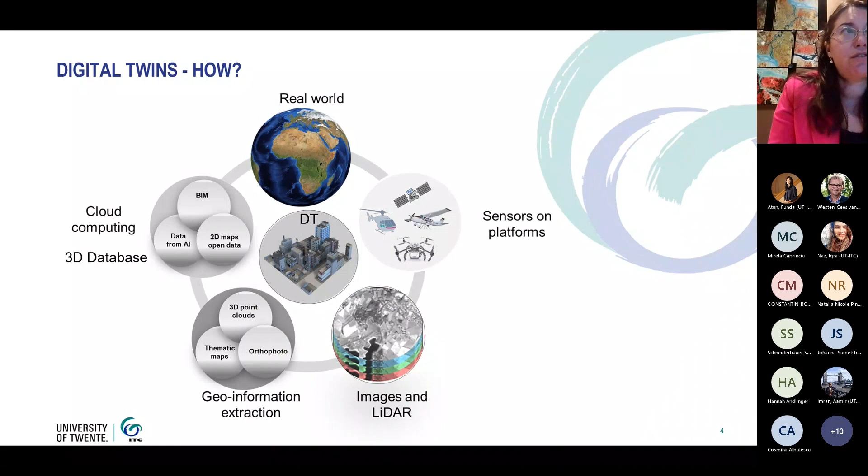You can see here on the slide that to represent our real world, we start by using different sensors like satellite images, aerial images or UAV images. We can also use sensors like LiDAR technology. And then having this information, we think how to extract meaningful information which will serve our purpose of creating our digital twin. We can, of course, use some automation or cloud computing, and we can store all this in digital databases. So usually this is the workflow that we are following. Of course, you can use part of it, or you can do different other combinations.

But as I mentioned, it's very challenging because every application can have a different approach. If you look at the first video in the top left side of my screen, you can see a transport case. What kind of data do we need for such type of case? How do we visualize it? What kind of information do we need to integrate?

On the second video, you can see that we can do different analysis, like shadow analysis. We can go on different scales, like a building scale or city scale, depending on the purpose or the application that we would like to focus on.

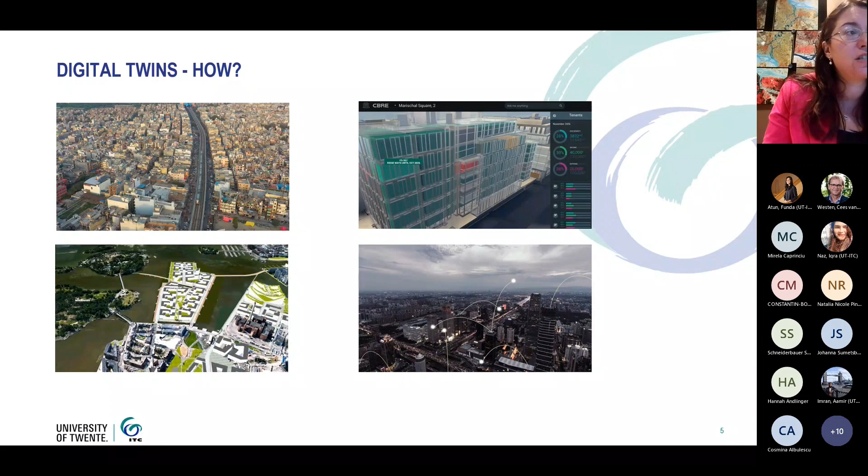On the third example, you can see that we can also use information from citizens. So all of you as citizens can contribute to our digital twin creation. We can use artificial intelligence or store the data in a cloud and distribute it via different networks so that we reach maximum efficiency and effectiveness of our 3D city creation. So you can see here some more of the video.

And the last example is how do we visualize our data to different stakeholders? So we need to adapt to whom we are presenting our outputs, who will be working with our data, are our stakeholders able to visualize and distribute it? So all these components, you can see that they hide different challenges. And it's quite a complex, let's say, topic.

There is some noise around. I would like to ask you to switch off your microphones, please. Thank you.

So also we can think, how do we integrate these different types of data coming from different sensors so that we collaborate with different stakeholders? And then we go to the level of planning, making different solutions and going forward to predict the future. And we can also visualize our final results in different ways.

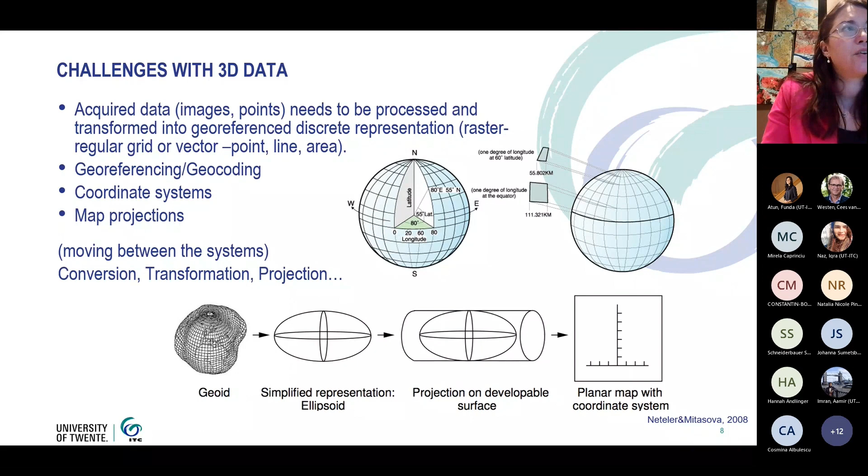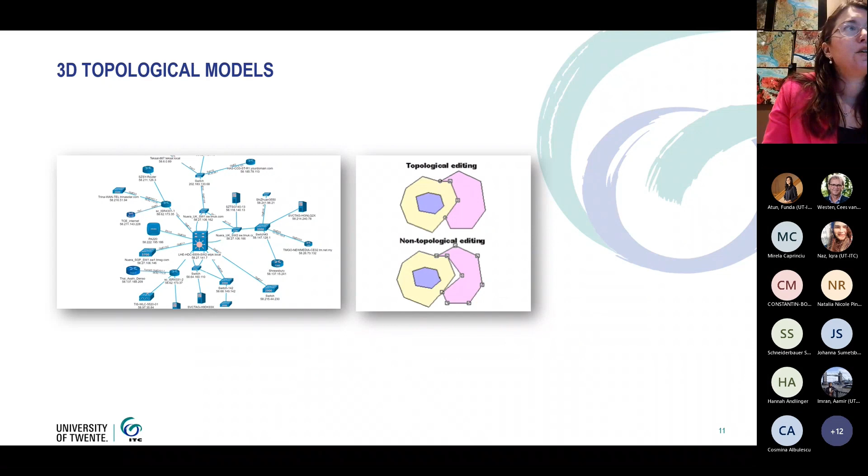Apart from that, we need to keep some logic, and we need to keep some links and relationships between our geometric models. And we also need to know what our elements mean. So we need semantic modeling. So whether we are representing a school or a hospital, this is semantic information attached to each individual building. So basically, this was a foundation of why, what, and how we do digital twins.

And here I would like to share with you some challenges that we can tackle by having a virtual replica of our environment. For example, we can solve some challenges related to transport, the built environment or urban mobility, some problems related to climate resilience, climate change, or simply communication or asset management.

I would also like to draw attention to the question of how digital twins can help manage or respond to natural disasters. I believe you're more expert on this than me, but if we ask this question, we can think about how a digital replica of a city can help emergency responders access a real-time understanding of the disaster, how it can impact the physical assets, for example. We can get some insights on the nature of the disaster, on potential effects of these disasters. And for example, we can think of strategies and plans for recovery or reconstruction after a disaster.

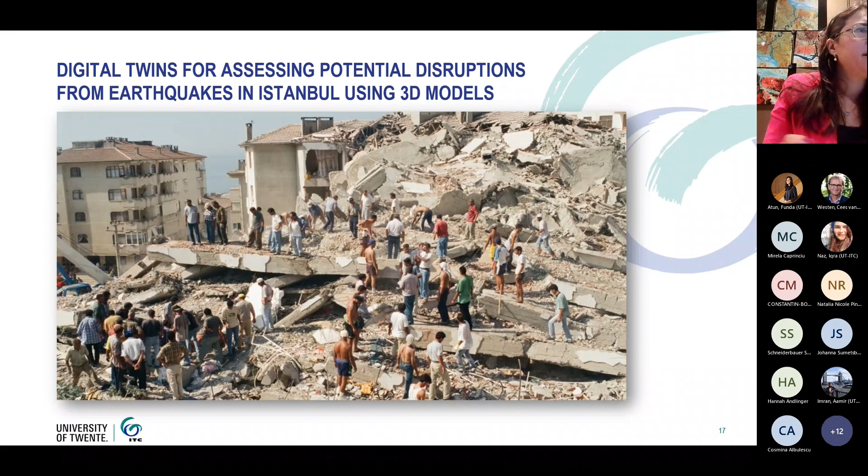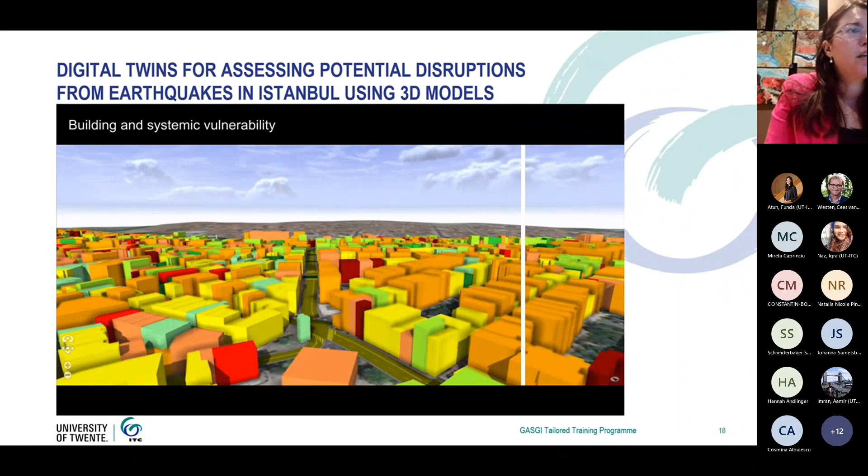Here is one application related to assessment of potential disruption from earthquakes in Istanbul using 3D models. You can see in the video that I will just start that our student who was working on this topic assessed the vulnerability by a very detailed assessment of each building, coloring it according to potential vulnerability. He also colored and assessed the road closure. For example, if the building collapses, how much of the roads will be blocked, what type of mitigation strategies can be performed.

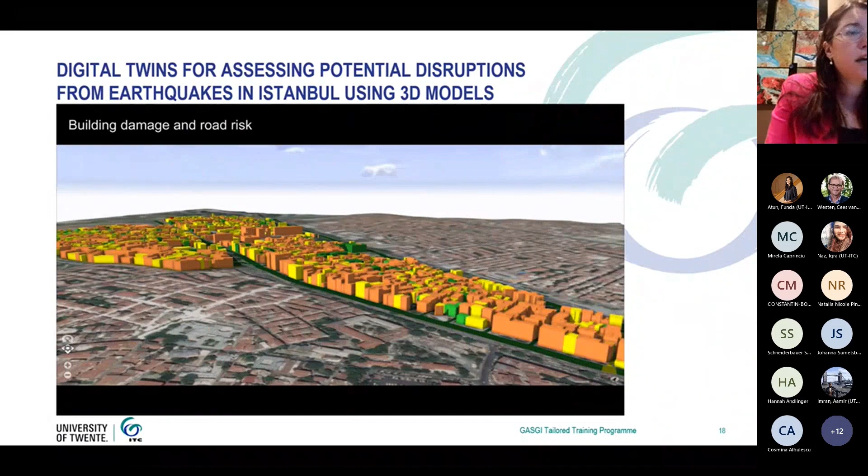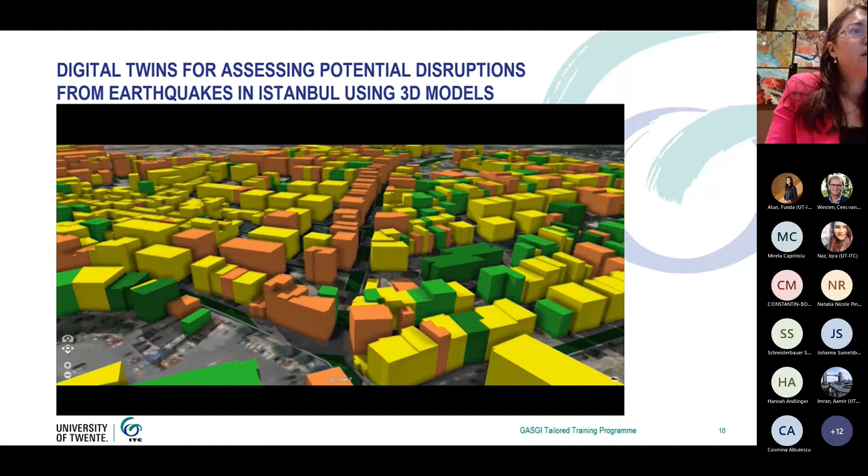All this was done in advance so that if there is a disaster in Istanbul, all needed parties and stakeholders have some idea where to react first, where to go, and where the people will be most vulnerable. You can see here building damage disaster and local road closure risk assessment.

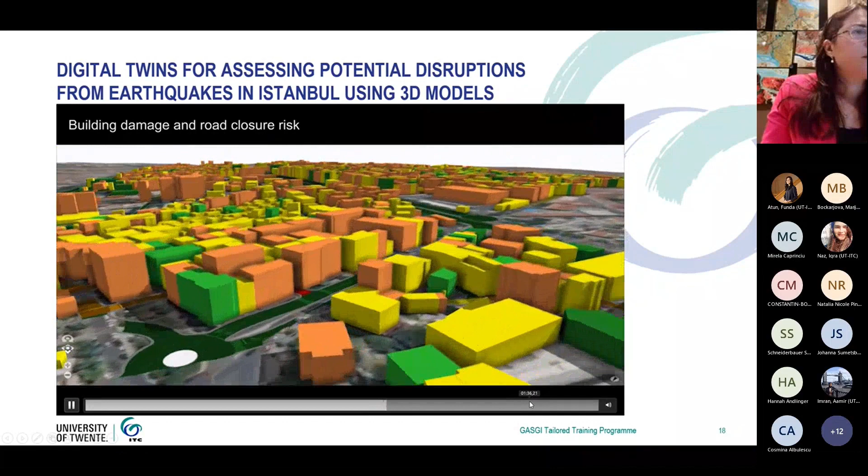Another case that I want to show you is related to a flood disaster possibility and how such a type of disaster can influence the distribution of a certain disease. If you look at my video in the lower bottom corner, you can see a very simple visualization of a flood in a slum area in Brazil, and we assessed, in case of a higher level of water, how many people would be exposed to this disease called leptospirosis. So it was a very detailed analysis.

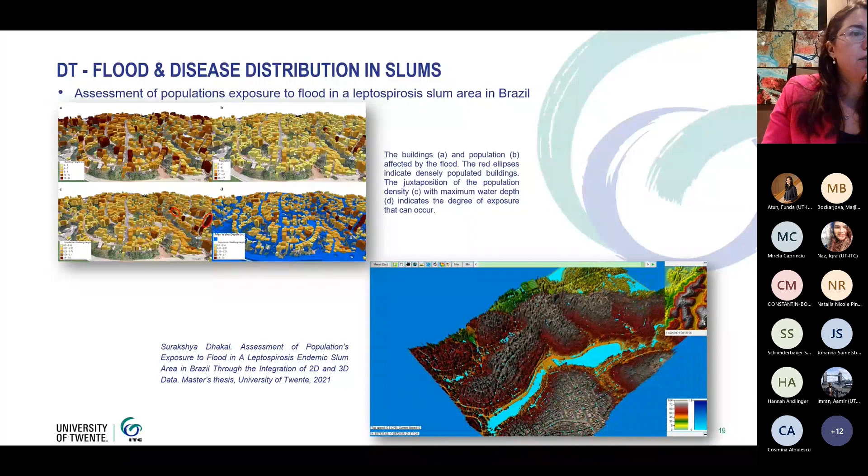For all examples that I'm giving you, you can see on the slides there are links. So if you want to read more, you can always go to the slides and check the publications yourself.

Here is one example related to digital twins for South Africa, and the project was called Jo'Trash. Here the students were trying to create a digital twin in support of effective trash collection. You can see here the method they have been using. It's ArcGIS plus dashboard. And what did they do? Basically, they created a 3D model. They located the garbage bins in the city. They also assessed the land use and the population density in the city.

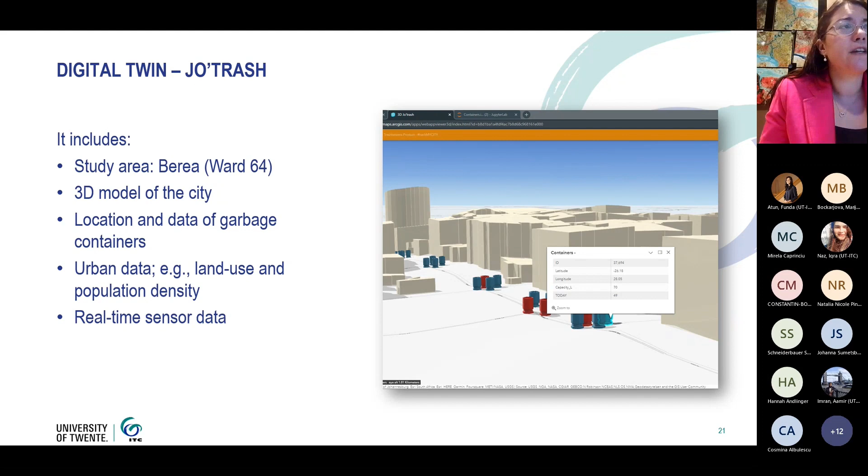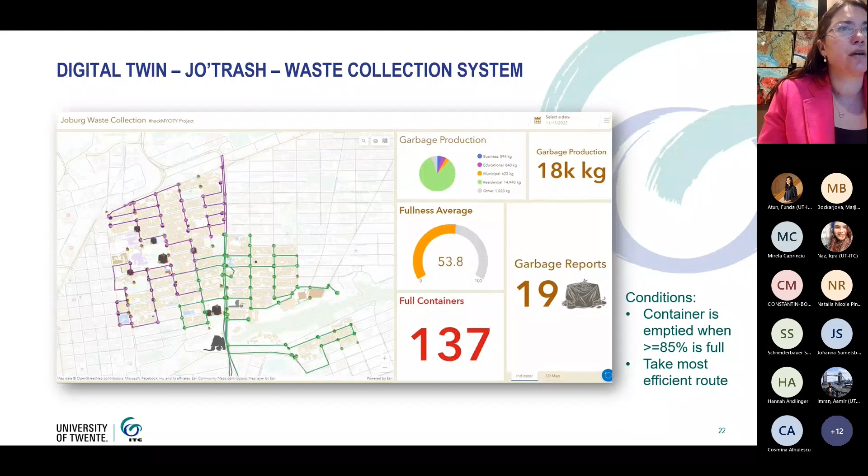And there are real-time sensors in each of the garbage bins, giving the level of fullness of each of them. So you can see that they created this dashboard, which collects real-time information and visualizes the status of each garbage bin. So basically, people in Johannesburg can scan this QR code and also give information to the stakeholders where they have to adequately collect the garbage. For example, there might be an illegal trash place, so they can provide information so that the authorities can take action on that.

You can see here how it looks when you scan this QR code. You get into this visualization, and this is the way you will see how full the containers are and in general their status.

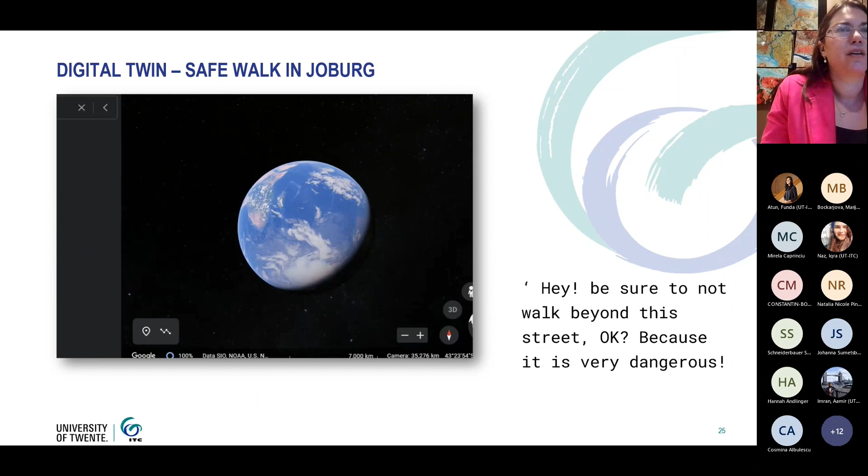Another example, again related to South Africa, was an application of digital twins which is similar to Google Maps, but instead of giving you the fastest route from point A to point B, since in South Africa there is quite a challenge related to safe walking in the streets, you get the safest route in Johannesburg. So I can show you what the students have developed. It's a mobile application, which also has a desktop application, which, like Google Maps, can give you the safest route from one point to another.

And since real-time data is involved, these routes are continuously changing. Also, as a citizen, you can provide some information so that these routes are continuously updated. If you see here on this slide, we have integrated static information and real-time information for this application.

And this is an example of the same development, but in a desktop version, which is being, let's say, monitored continuously by the involved stakeholders and organizations that need to take action about it. This is also the methodology, if you want to know how it was done. And this is what you get during your usage of this application.

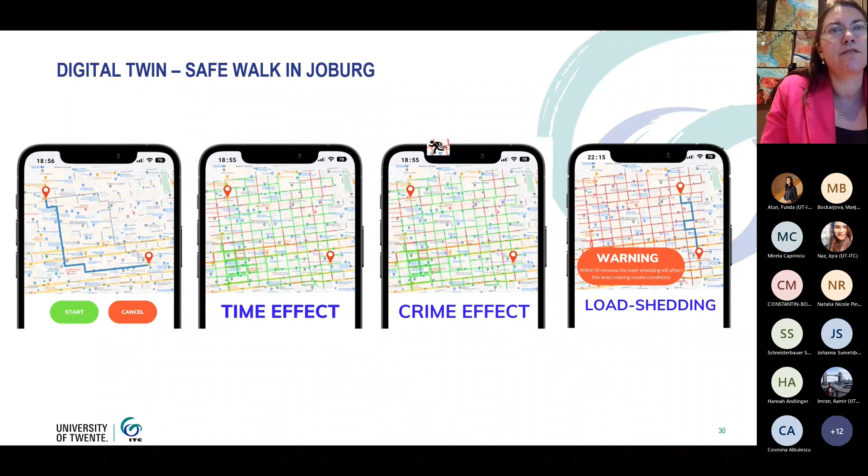So you can have the time effect, you can have the crime effect, and you can see here some warnings. When you're walking, you can see a real-time warning: okay, please avoid this road, go left, right, something like this. How can this also help urban planners? Of course, it can help because they can also monitor how many inhabitants have been in danger on certain routes, so they can take some actions to, let's say, improve this situation.

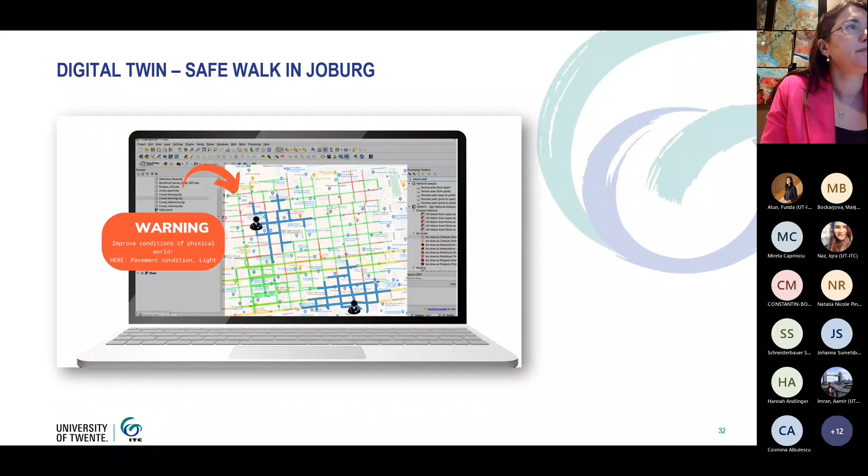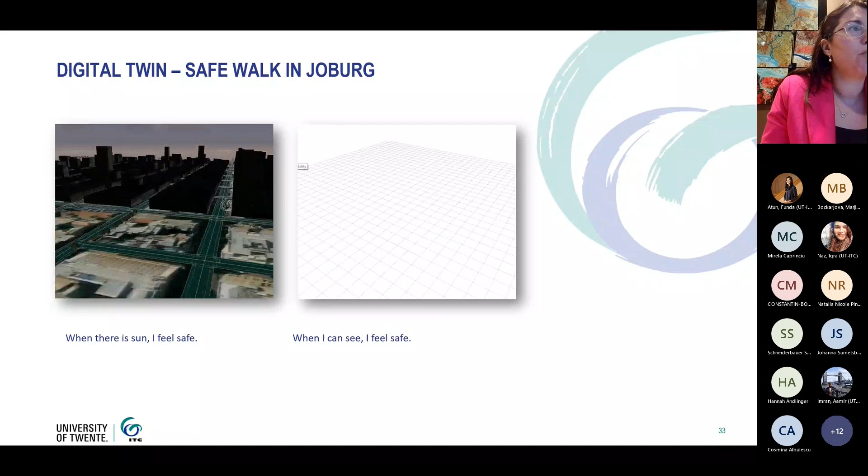This is the same story, but giving you warnings on the desktop. Apart from that, you can see that the application also incorporates some kind of 3D visualization, which takes into account the sunlight. So if there is sun, you feel safe. So it also gives you those streets that are open, that are bright. So it gives you a safer feeling when you're walking and navigating through the city.

And the second video I will show you is again related to that, but not with the sun; when you can see more, the openness of the streets also plays a role.

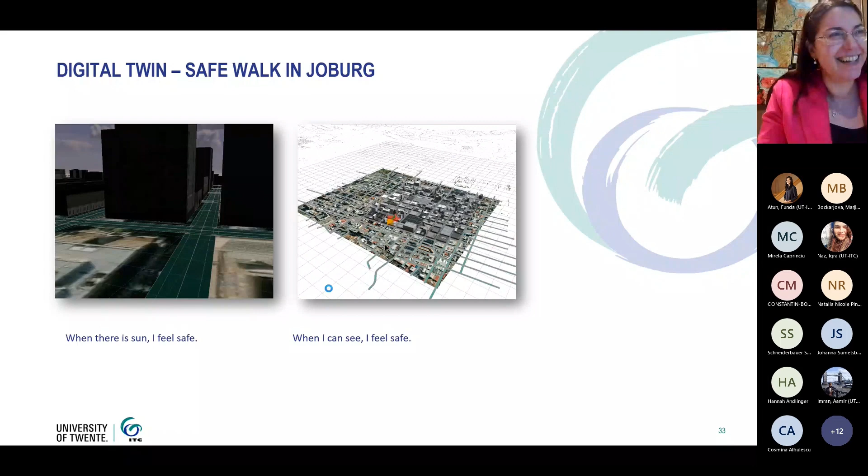Just a sec. Okay, the presentation crashed. It seems the video didn't start. I will restart it. There are too many videos in this PowerPoint. You also have a very interesting desktop. Sorry, very full. Yeah, sorry, I will restart it. Wait, we were up to here, yes.

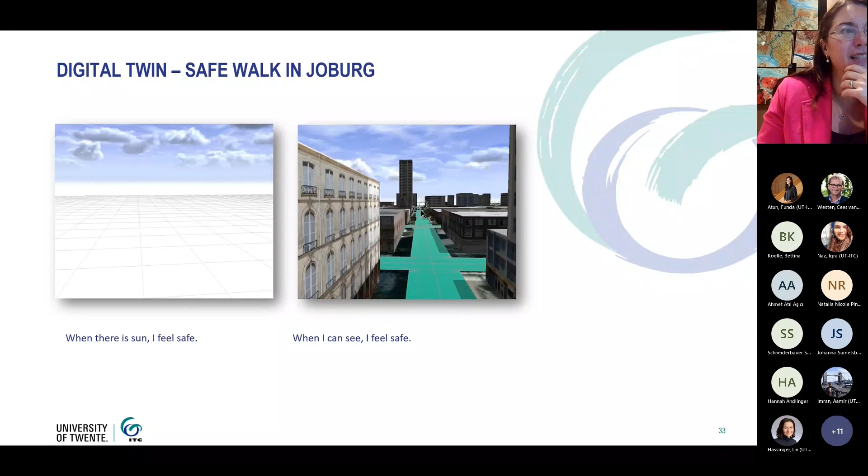So this was the video which we stopped. On the right one, you can also see how the students have performed visibility analysis. So one was shadow analysis due to the sun effect, and the other was a visibility analysis. And all this is integrated in the application that you can have on your mobile phone.

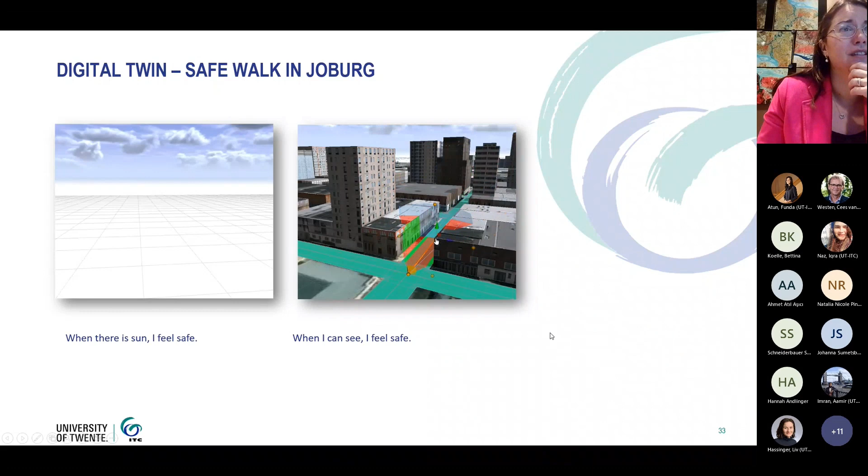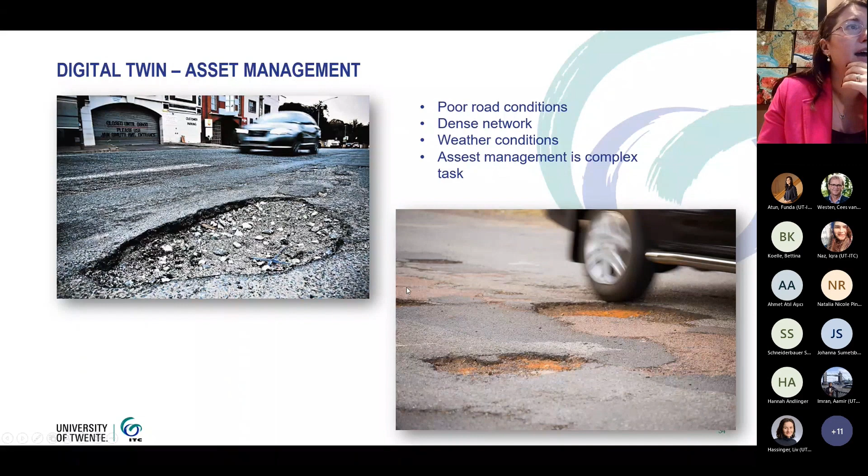Another application I want to show you is related to asset management. There are many countries where the roads are in poor condition, and there is, of course, a very dense network, and due to weather conditions the roads can be damaged. So how to tackle these problems and how to get, let's say, continuous real-time information so that we can update? You can see here the application that students have developed. They have visualized the roads based on their status in terms of asset. And you can see the dynamics.

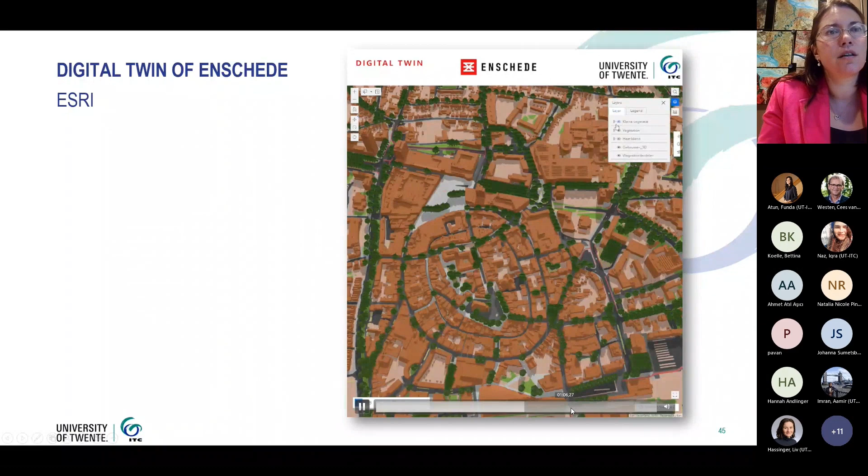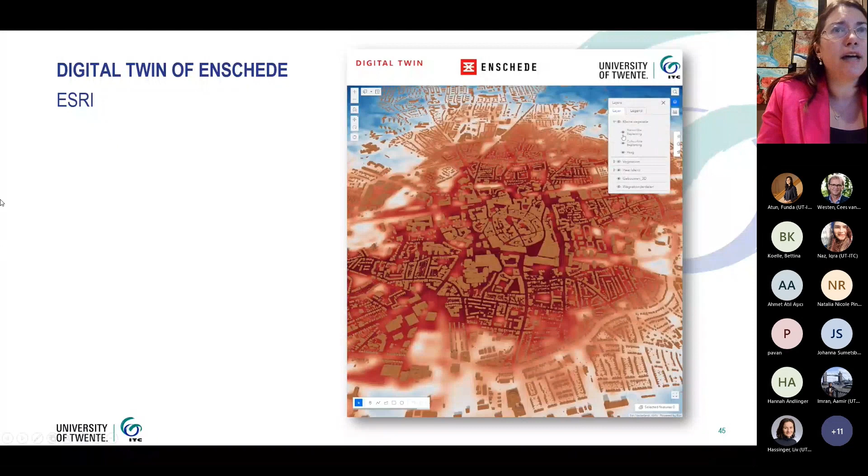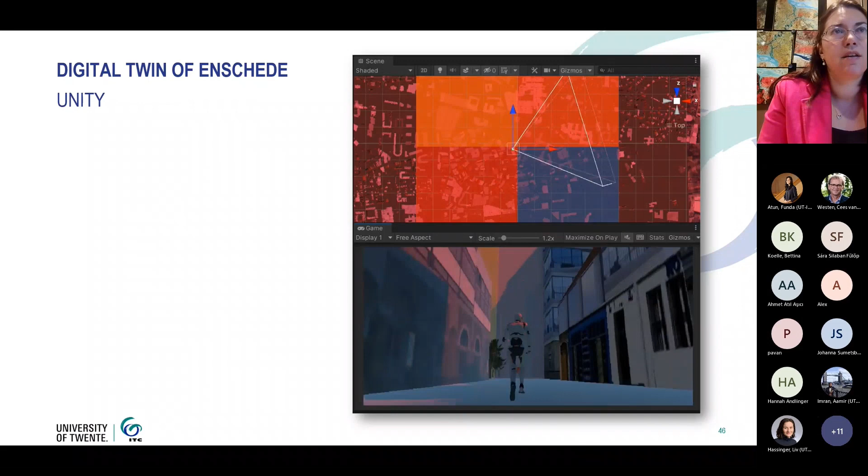But the more important thing for me was to show you that you can have this heat map overlaid on our city, and you can visually see where the critical areas are. So this is using a GIS type of platform. How can we use that in a virtual reality environment? This is the Unity platform. I will show you this video where, if you walk inside the city in 3D, you can already get your orientation on where it is warmer and where it is colder on your way. So there is a combination of top view and first-person navigation view.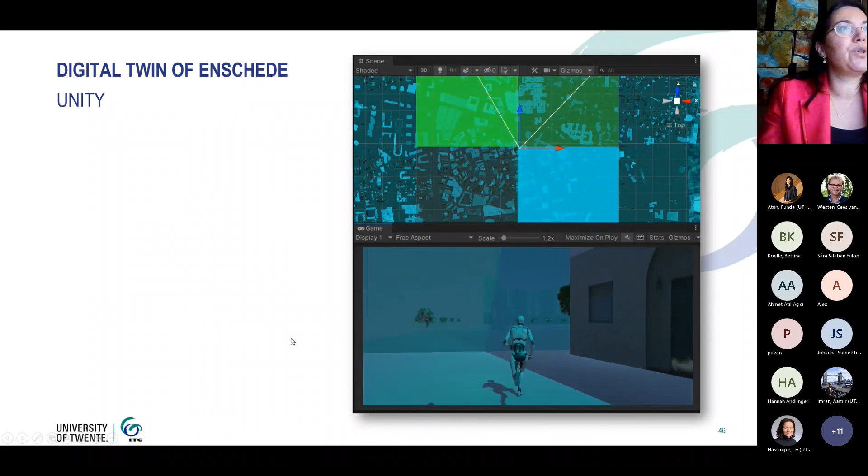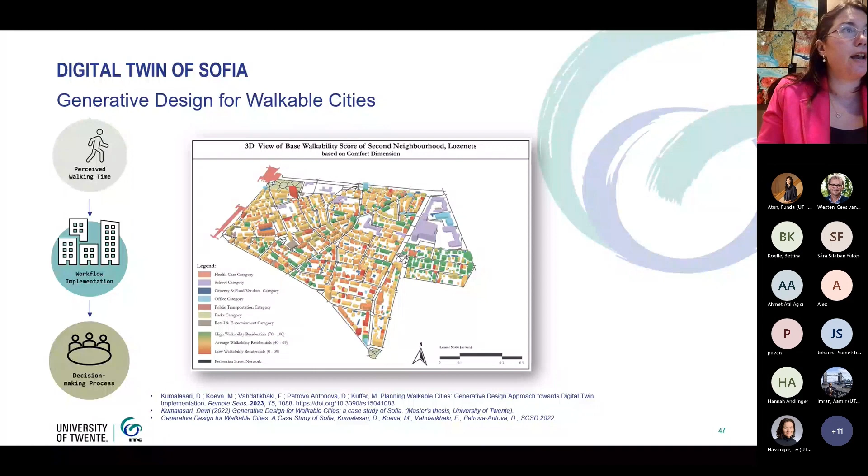And this is my last example for today, where I want to show you how challenging it is to visualize different types of data sets so that we create our digital twins, and moreover to show them in a web environment. So this is again our city of Enschede. And you will see that we used different open source data to visualize our city in different levels of detail. And you can see here that we are coloring our buildings depending on their purposes.

And apart from that, for this application, we have integrated different types of data. You can see UAV data, terrestrial laser scanning data, but also mobile application, which means people data. And we try to also visualize it in virtual reality. So this yellow dot on the video is our new building where we are currently located. And basically we wanted to

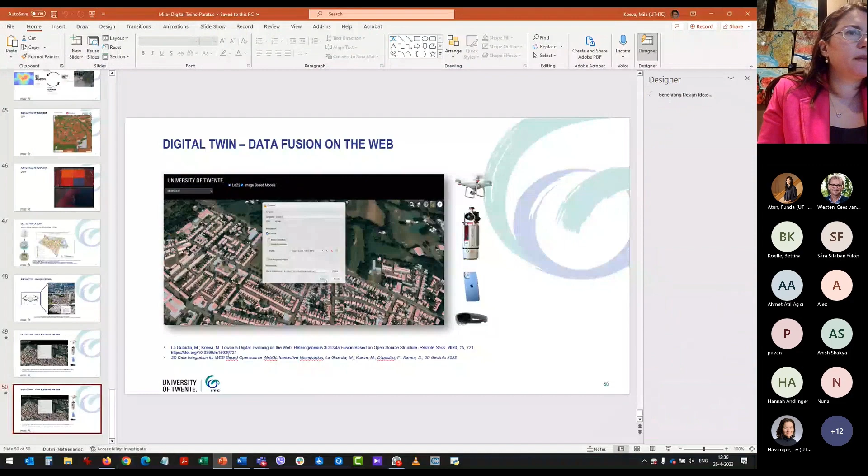Here it is. So what did we do? We have acquired with drones, as I mentioned, but also with terrestrial laser scanning and mobile laser scanning. And you can see that we can visualize all the stages of the construction of our building with so-called point cloud data. So you can see the ground floor, then I will now switch to the first, second floor. You can see it doesn't look very beautiful, but it's because it's all in the phase of construction.

And the challenging part of this work was to integrate different types of data. So you can see this is a BIM model, building information model, which is combined with the point cloud data, and you can access the building from outside, from inside, and get a 3D realistic overview of what the building will be. So that was my last example.

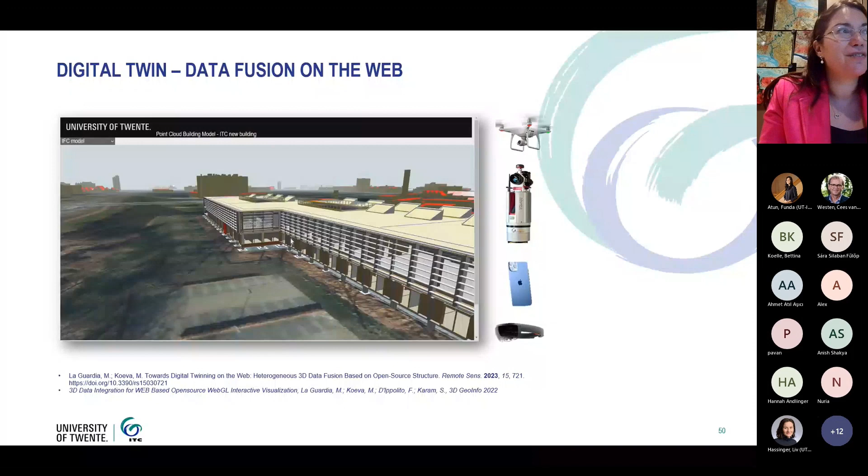I hope it was interesting for you, and I hope I gave you some insights into how you can use digital twins for your applications.

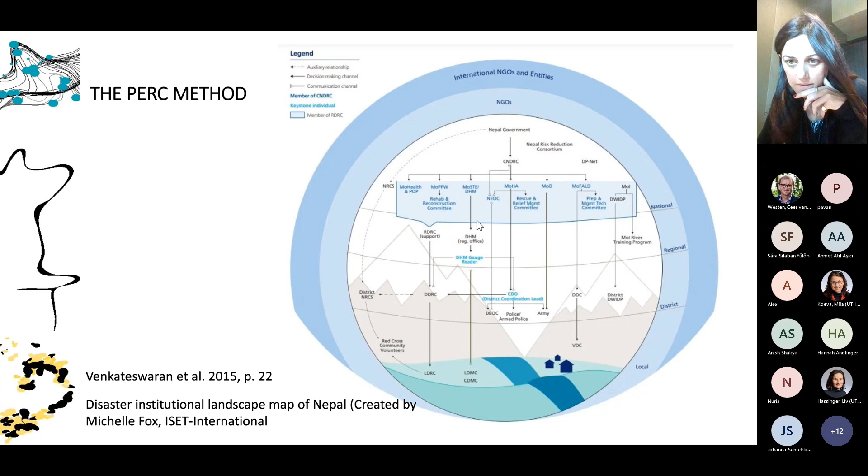So this is an example of how they mapped the institutional landscape. This is for Nepal. They are mapping them, but they're also showing how the relationship works among these different institutions that are responsible for disaster risk management. And they also included some NGOs and political organizations, for example, here there's the Red Cross community and other political organizations.

And I just included these questions as examples. So I showed you three different components, and I also showed you the characteristics or indicators that they use to investigate these components. And for each component later on in this report, there are various questions, and these are some examples. They also divided these questions according to different phases, and here the first questions are to understand the situation immediately after the disaster.

It asks whether the evacuation worked, and the early warning, about protection of important assets, and what was the impact, what was the indirect impact of the disaster. And then we have the response and recovery phases with different questions. If you want to use this method, there is a huge report, here is the reference and also at the end, and all these questions, you can have a look at them to understand how they assess the capability of these three different elements.

Okay. This is the third one. It is detecting disaster root causes by this German organization, DKKV. For example, they say root causes are an interrelated set of widespread and general processes within a society.

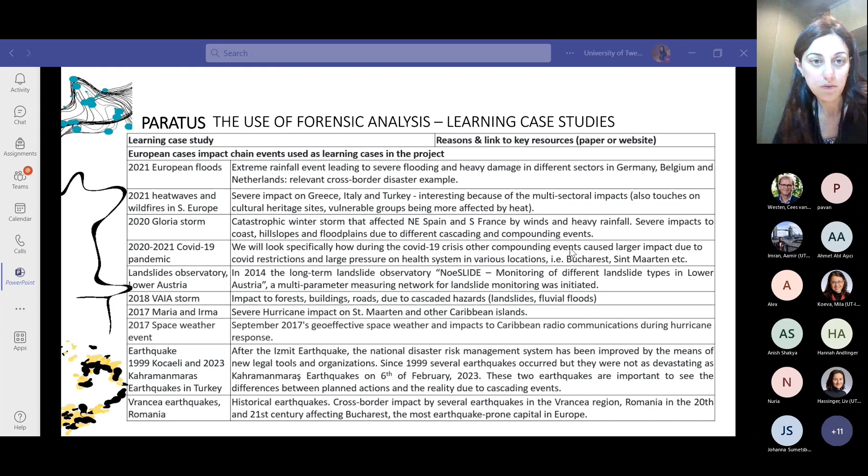And we defined a protocol to follow the forensic analysis in PARATUS. This is the current situation, but I am sure we will develop it a little bit further by combining it with the impact chain method. According to this protocol, it is important first to describe the hazard, as I showed you the data in the very beginning, the intensity of the hazard, or if it is an earthquake, the magnitude. So we need to describe the hazard first, and then we need to describe loss and damage due to this hazard, and also direct and

indirect impacts. And we will consider whether the impacts are differentially distributed between different areas, social groups, types of infrastructure and sectors. So we won't only list the direct and indirect impacts, but we will also look at how they are distributed between different areas and sectors. And we need to investigate the differences between less exposed and hazard-prone social and economic elements, or more exposed and hazard-prone elements. So which ones suffered more from the impact?

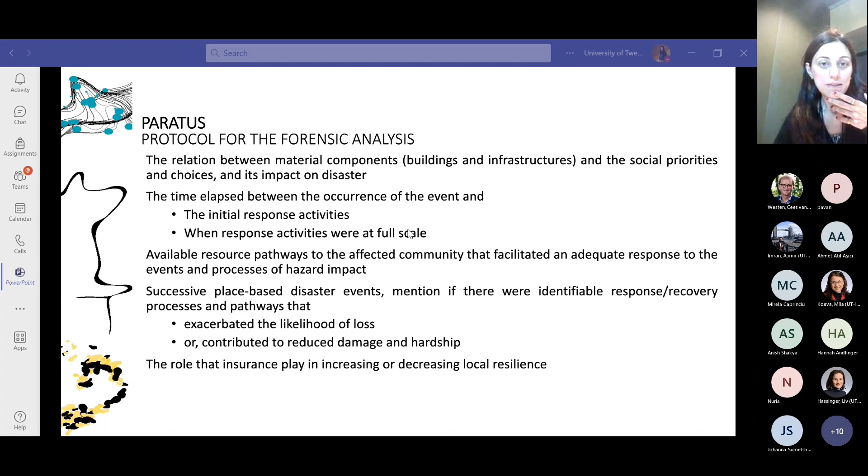It is also important to look at the relation between social priorities and choices and how this relation has an impact on the disaster. And the time between the occurrence of the event and the initial response activities, and when the response activities were at full scale, is also important to understand. We need to look at available resource pathways to the affected community and whether they facilitated an adequate response to the events and processes of hazard impact. Another aspect is to see whether there were identifiable response and recovery processes, and also the role of insurance in increasing or decreasing local resilience. So these are the aspects that we will look at in the learning case studies.

Additionally, we ask our partners, while preparing these learning case study reports, to mention the differences in the ability of different social and economic groups to cope with and recover from disaster and its secondary impacts. For example, Istanbul megacity is one of our case study areas, and you can imagine that in a megacity there are different social and economic groups, and what the differences are between these groups to cope with and recover from a disaster. So it is important to understand.

To elaborate such differences, we also want to discuss the main elements that explain the social and spatial differentiation in such processes. To understand the coping mechanisms and resilience, we need to investigate the role of social organization, social ties, and social networks, and how they contribute to build resilience. This can be different in every culture, so it's also very much linked to the current situation in the area and the political environment. It is important to mention the specific social organizations and practices that were activated by the hazard. We see a lot of examples of such practices after a disaster, and what their impact was, and how they helped enable the community to self-organize and respond to the disaster.